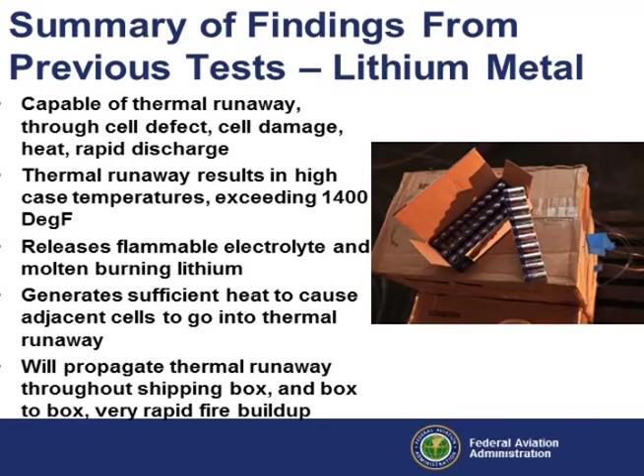They also can explode, and when they do, they generate a fair amount of pressure. They're self-igniting, and they will rapidly ignite the current packaging. The 1301 will suppress the electrolyte portion of the fire, but not the lithium portion, and seems to have no effect on the speed of propagation of thermal runaway.

And again, if you can keep the electrolyte from burning, you end up with an accumulation of hydrocarbons, increasing the risk of flash fire or explosion.

After 10 years, we reached the point where we wanted to see just how the aircraft would react to a relatively large full-scale fire. For that purpose, we used a 727 that was kindly donated by FedEx.

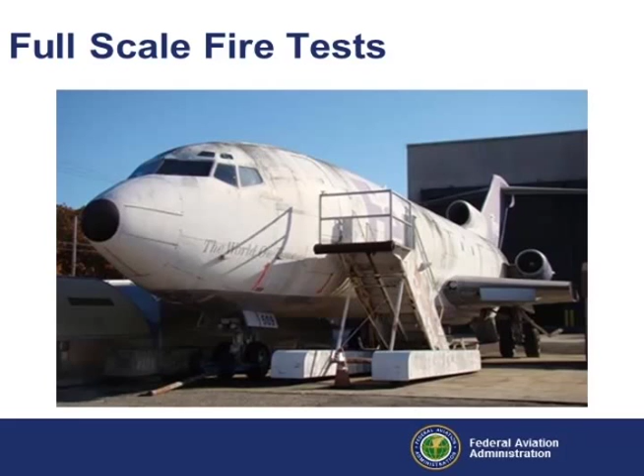The objective of these tests was basically to document the characteristics of fires involving large numbers of small lithium batteries in a realistic aircraft environment.

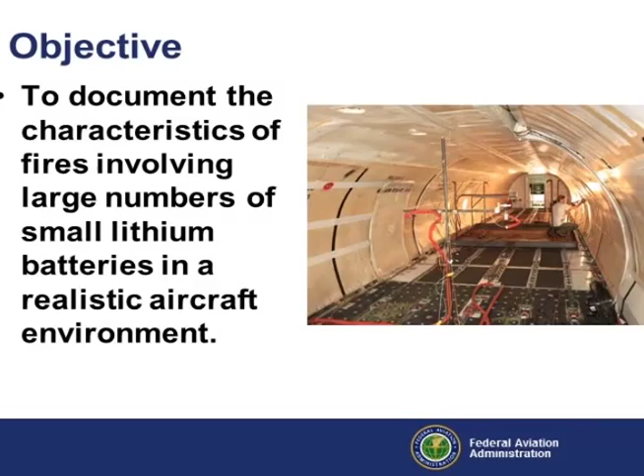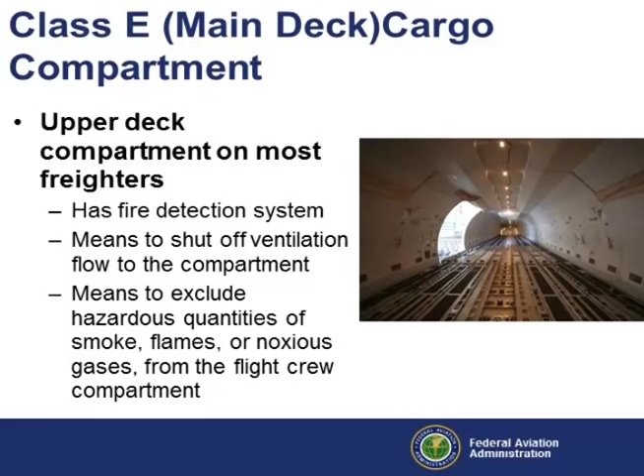It's worth reviewing that an upper deck compartment on most freighters only has a fire detection system. There's no halon 1301. It does have the means to shut off ventilation, and theoretically the means to exclude hazardous quantities of smoke, flames, or noxious gases from the flight crew compartment.

So we developed a test plan. We settled on a fire size of about 5,000 cells, keeping in mind that many shipments can exceed 50,000. So we ran, or were looking at, 5,000 cells of lithium ion.

We ran a separate test with, as it turns out, 4,800 lithium metal cells. And then as a control, we used another 5,000 battery load of mixed older style batteries: alkalines, NiCads, and nickel metal hydrides. We used two different ignition sources, running two separate tests for each fire load.

One where we simulated a thermal runaway, and the other where we had a small adjacent fire to get the cells involved.

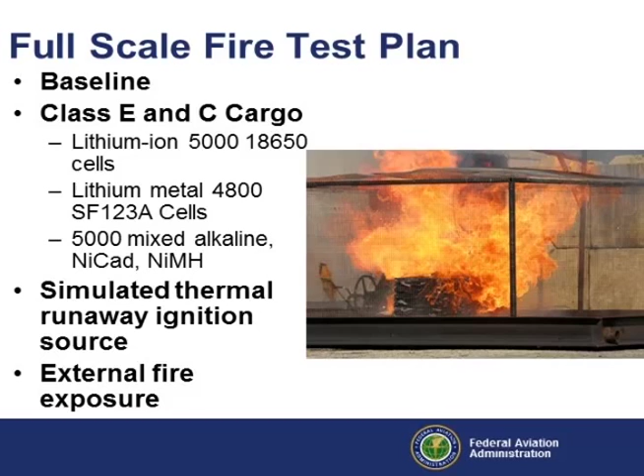So we instrumented our 727 with thermocouples everywhere, smoke meters, heat calorimeters. We measured noxious gas quantities and had extensive video coverage.

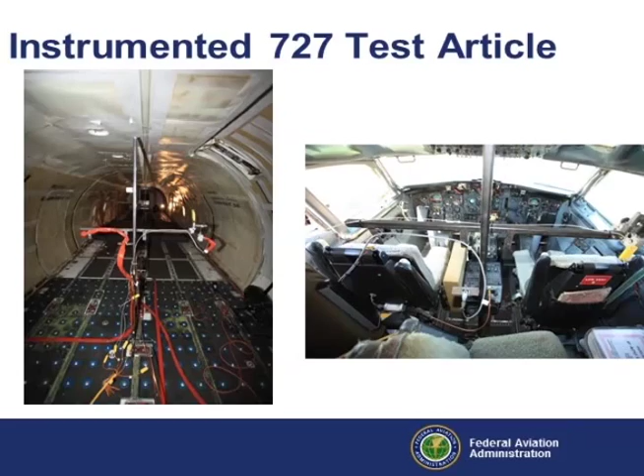We actually repeated all that in three locations: the main deck, the lower forward compartment, and also on the flight deck. Probably the most important thing in this simulation was to get the airflow within the aircraft correct. We wanted to try and simulate a plane in flight while still on the ground.

Air packs are configured differently, at least on a 727, depending on the location of the fire. If the fire is in the lower deck, you set it up differently than if it's on the main deck. So with the help of the Boeing company, we developed two configurations, one for a Class E fire and also for a forward Class C compartment fire. I won't be talking about the Class C fires today, but that information will be available on our webpage.

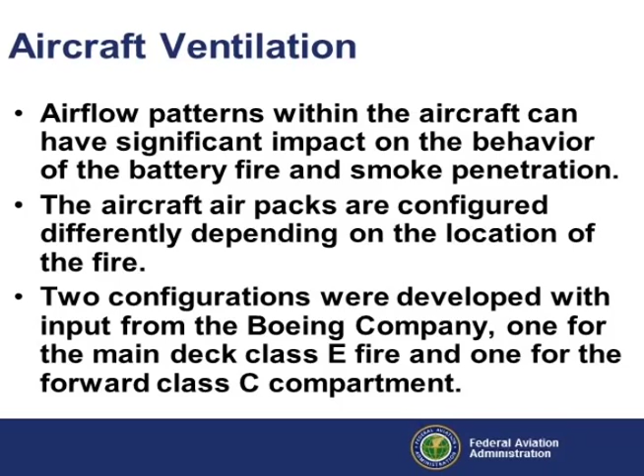To verify that we had the configurations right and were getting realistic results, we conducted air exchange tests and got very, very good numbers. In the unpressurized configuration, which is what you would have in a Class E compartment fire, we got air exchange rates of about almost 48 minutes while maintaining a 1.7-minute air change on the flight deck. We were assured by Boeing that these were good numbers.

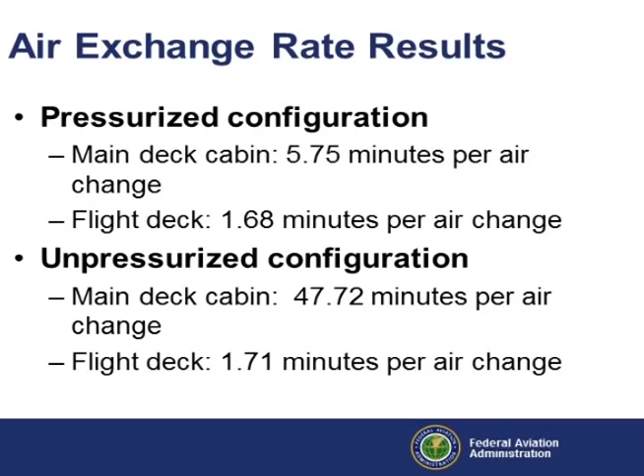We conducted a couple different baseline tests. This one was to verify the operation of all the instrumentation. This was just a cardboard load. And then, can I have this video run, please?

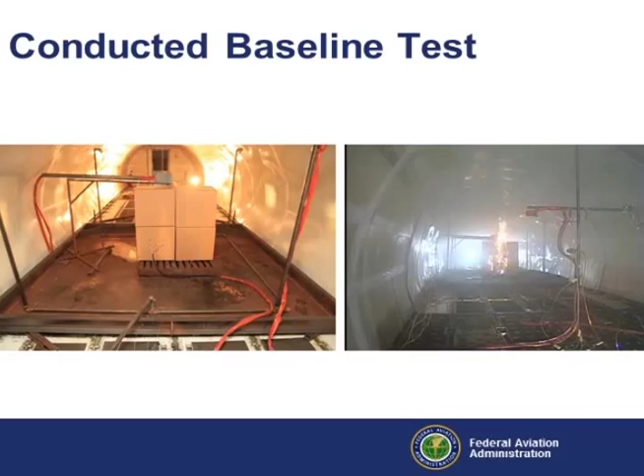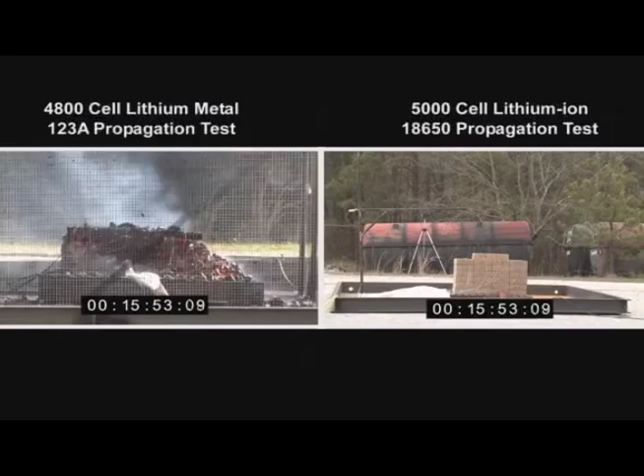We also ran tests outside of the aircraft prior to running the tests in the aircraft, to get a handle on how big a fire a 5,000 cell lithium battery fire would be. These tests weren't run concurrent, but we have them synced up here on the screen. Ignore the gentleman walking in front.

The cells to the left of the screen are lithium metal cells. The cells on the right are lithium ions. Very different behavior, particularly in terms of the timeline. Here at 9 minutes from the time we simulated a thermal runaway, we already had a pretty good fire going on the lithium metal side. Still had not broken through the packaging on the lithium ion side.

A little difference in the way the screens look. We had a cage on the metal test. We didn't use a cage on the ions because our safety people saw the ion test and said, you will cage the metal test.

So the metal fire was over and done in about 16 minutes. We consumed all the cells, extremely hot. The remains of that fire stayed hot for hours and hours and hours. We had over 2,000 degrees down in the middle of that battery stack.

So at this point, we're roughly 19 minutes in from the time we began the simulation of thermal runaway. We've just broken through with the ion test. One interesting thing here, if you watch the debris field around this, the ions really tended to what we call rocket. We had some cells that shot over 130 feet from the base of the fire. One of our video people said it was like being back in combat because these flaming things were shooting over his head, and you can see why our safety people said we should cage the next one.

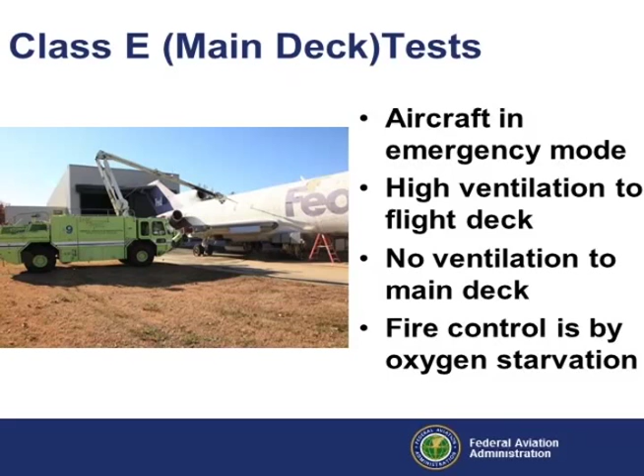Should mention that we had outfitted this aircraft with a deluge water system to control the fire should it have gotten out of control. We were monitoring temperatures not only at the ceiling but above the ceiling and using that as a guide to when we should end the test, so we would still have a test article to work with.

So our initial test was a mixed cell test. Not unsurprisingly, it's essentially a cardboard fire. All the older battery chemistries use a water-based electrolyte; they are essentially non-flammable. So in this case, we let the test run for over an hour and a half. We had a smoldering cardboard fire, got relatively low ceiling temperatures. Fire temperature itself, we never got above 1,000 degrees. We did fill the main deck with smoke, but got no smoke into the flight deck.

One other thing to keep in mind is this is an empty airplane. These are the only flammables that are in the aircraft, unlike what you would see in a more real-life instance. So mixed cells, not really a problem.

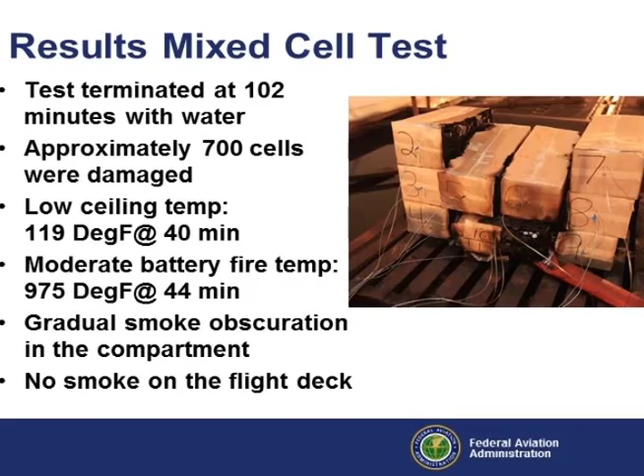We repeated the test with two different lithium-ion tests, one with the simulated thermal runaway and one with the adjacent fire. Got very similar results. We let the fire run about an hour. We only consumed about half the cells, so you have a very long-term fire with lithium-ion cells.

Ceiling temperatures reached almost 1,500 degrees, which is right around the certification level for aircraft cargo compartment cargo liner. Battery temps hit about 1,300.

We did dramatically decrease the oxygen in that compartment during the fire, which did slow the fire down, but it did not stop the propagation from cell to cell and the release of the flammable electrolyte.

We did experience some light smoke in the flight deck near the end of this test, and we also did some significant damage to the aircraft. Even though we didn't penetrate the cargo liner at any point, we had to replace a lot of it prior to running the next test.

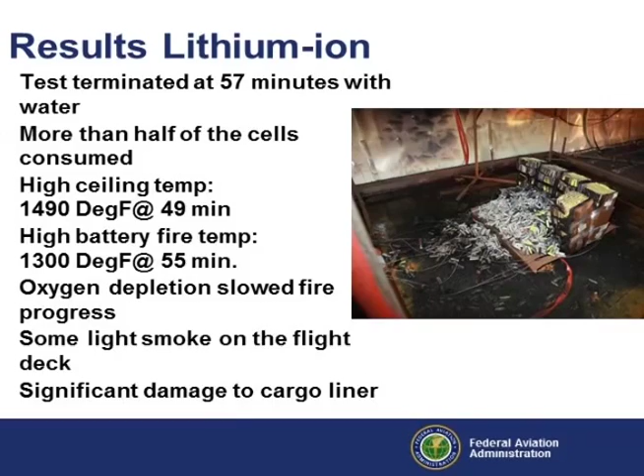Sorry, moved on to the metals test. It looked the same to me.

This test again ran about 16 minutes before we had to shut it down. In this case, the aircraft was in danger of getting a new sunroof in the ceiling. We only had consumed about half the cells in that 16-minute time frame.

Ceiling temps exceeded 1,700 degrees. We're not exactly sure what the battery stack temperature was because our thermocouples peak at 2,250, and we easily exceeded that. Oxygen starvation with lithium metals had very little effect in slowing down the fire intensity.

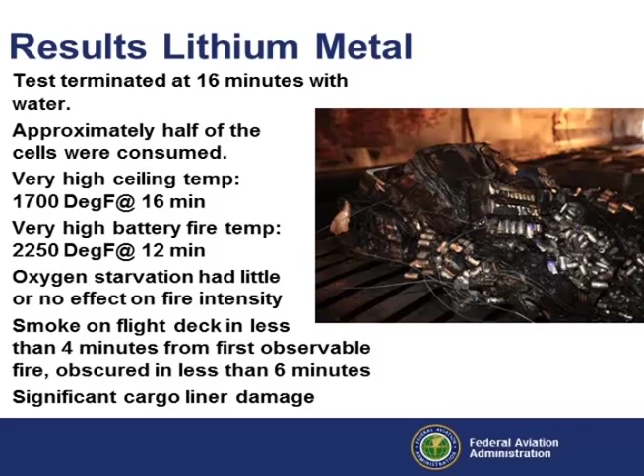And probably most significant, we got smoke on the flight deck less than 4 minutes from the first observable fire, and we were fully obscured within 6 minutes. Again, we did significant damage to the aircraft.

And I do have a video of that test, which if I could have that run, please.

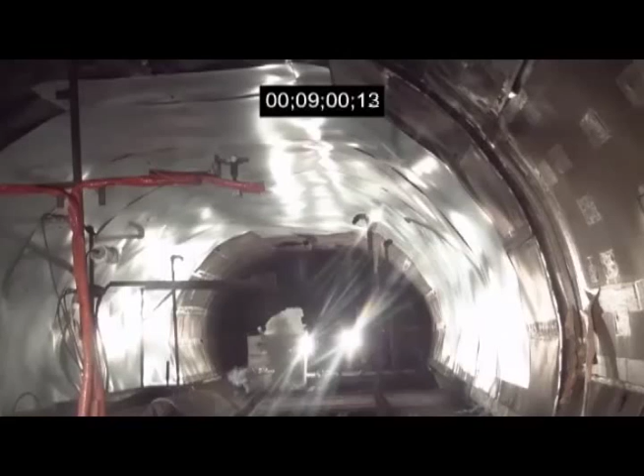At 9 minutes from the time we turned the heater on that simulates a thermal runaway, we had the fire break out of the boxes. If you keep an eye on the clock counter, it skips ahead a little bit, but fire buildup was incredibly rapid.

So it's actually probably about now you would begin to get smoke warnings in the cockpit, smoke detection. And at this point, you've already got a pretty good fire.

So here we're roughly a minute from the time we first saw the initial flame. The smoke is already beginning to build up within the compartment. You would see a more rapid buildup in a compartment, obviously, that is full of cargo. The image on the right is an infrared view because we shortly lose the visual.

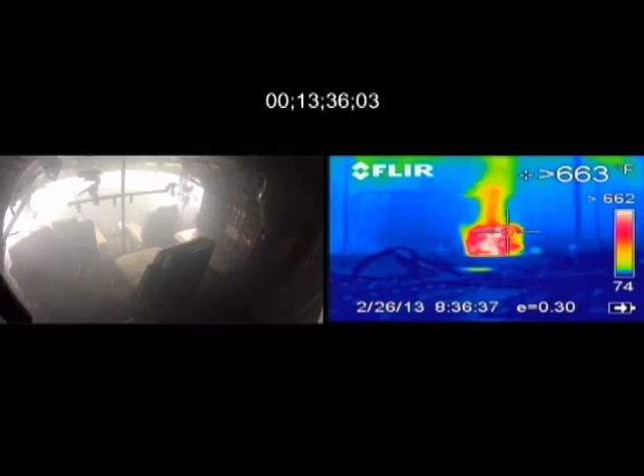Now, this aircraft was slightly fire hardened in that we put an extra layer of cargo liner above the fire itself. So a normal aircraft, you might have had penetration earlier.

So at this point, the flight deck is fully obscured, and we are extinguishing the fire with copious amounts of water.

So just a little rehash. We ran the 2 different ignition sources. We simulated the thermal runaway, and we also used an external fire to initiate the battery fire. Except for a little bit of differences in timing, we saw very little difference, or no difference at all, in the final effect and the final fire.

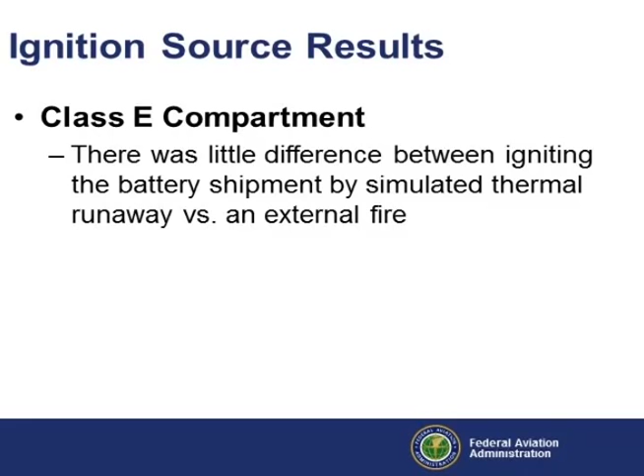Looking at the Class E tests, how well did the compartment do in containing these tests? With the mixed cells, it easily contained the fire. Lithium-ion cells, we would call it marginal in that we didn't have any penetrations for an hour, but in reality, if we had gone much beyond that, we would have had some areas where the cargo liner would have failed.

The lithium metal flat out did not contain the fire. We in no way at all did the Class E concept work with lithium metal batteries.

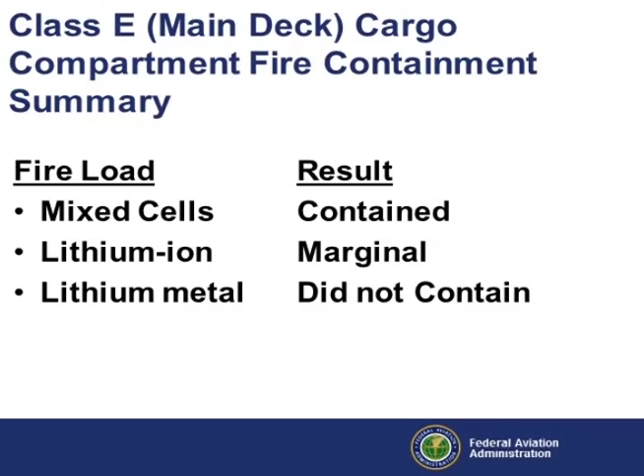Now I have one more video, and I just included this to give you an idea on the explosive properties of the hydrocarbons released when these batteries go into thermal runaway.

To set this video up, we're doing some work looking at charging stations for tablets. A lot of airlines are going to tablets for passenger entertainment, and they're using these charging stations where you have multiple tablets and a container all hooked up and charging.

In this particular test, we used a galley cart to simulate the charging station, and it only had 5 tablets in there, of which really only one of them got involved in this fire. And I'm going to let it play here.

What happens is it self-ignited, which sometimes happens with an ion cell. We had a pretty good fire going.

This was in a 737 test article that we have.

We had an explosion that actually put itself out, but as you can see from the smoke coming out, there's still hydrocarbons being released by the burning cells. So not being content to let it go at that, we decided to give it an ignition source, and we got that.

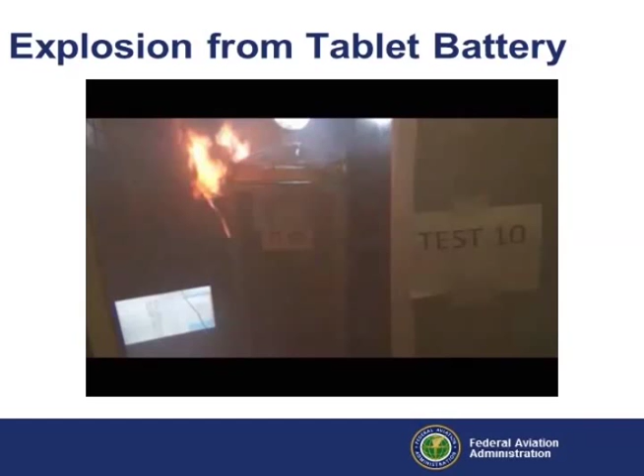Even though I didn't talk about our Class C work today, we did have an event with one of our Class C tests where we had an explosion in the aircraft that resulted in significant damage. And if you want to take a look at that, you can go to our website. And if you search on lithium batteries or look through any of our recent triennial proceedings, any of our systems meetings proceedings, you can find a wealth of information on lithium batteries.

Thank you. Thank you, Harry. Turn it over to John. Okay, if I could have the presentation up, please. So first of all, thank you for that, Harry.

The work that my company's been doing has really been looking at how can we protect lithium batteries and equipment containing lithium batteries at the package level. Very brief background. My company specializes in fire and thermal management. Many of you probably use our products every single day but have no idea you're using them. We do many things ranging from the technology that enables carpet in aircraft to meet low smoke and toxicity as well as flammability requirements, all the way through to cargo liner repair products that maintain the integrity and fire performance of the cargo liner.

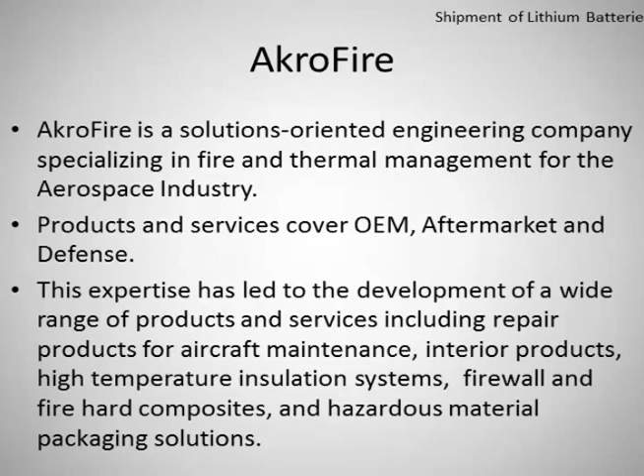So what does that all mean with regards to lithium batteries? Some years ago, there was a rule called HM224B, which really covered the shipment of oxygen generators and oxygen cylinders. And there were two key aspects to this rule with regards to flammability. The first thing was that oxygen cylinders and generators needed to be packaged in boxes and containers that would prevent flame from exiting or entering the package and causing either the oxygen generator to ignite or the oxygen cylinder to vent and obviously add oxygen to the fire.

The second aspect of that rule was also in the event of a halon-damped cargo fire, the inside of the packaging needed to stay below either the self-venting temperature, which was 300 degrees for an oxygen cylinder, or in the case of an oxygen generator, not allow sufficient temperature to cause the oxygen generator to ignite and therefore, again, add to the fire. In response to this rule, AkroFire developed a range of fire and thermal pack technologies, and together with Americase, we developed a complete range of HM224B packaging solutions.

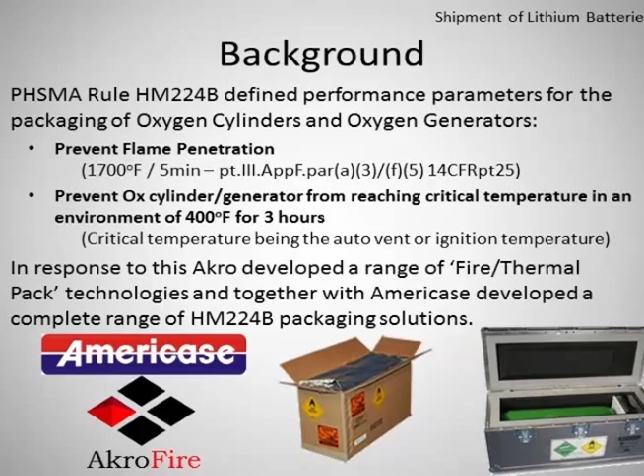So then looking at future hazmat challenges, obviously lithium batteries then came to the forefront as a real challenge. So we decided to look at how we could use our HM224B experience and technology developments to mitigate the threat of lithium batteries at the package level. The existing concepts that are out there are very much based on our HM224B work, which includes rigid metal containers containing the fire pack technology, together with simple overpack containers which are designed to just stop a small-scale fire on the inside of the box.

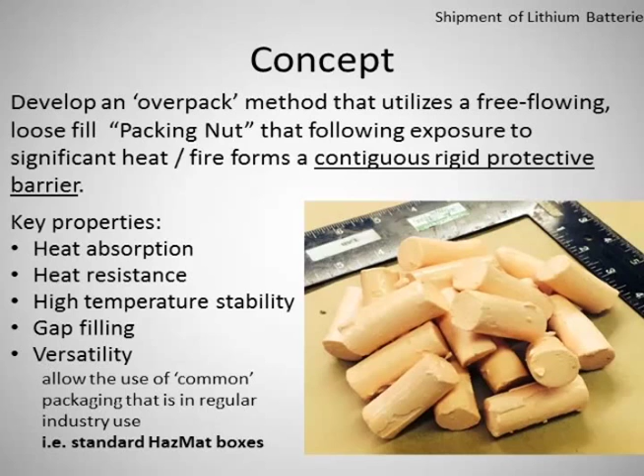The real challenge in creating a packaging method is the incredibly broad spectrum that covers lithium battery shipments. The oxygen generators and oxygen cylinders were very, very defined shipments, but as we've already discussed, the sheer quantity of batteries and equipment containing batteries being shipped makes it a challenge to come up with a packaging methodology. So the concept that we've developed is essentially a free-flowing, loose-fill packing nut that, following exposure to significant heat and fire, forms a contiguous, rigid, protective barrier. The key properties of these packing nuts are that they're heat-absorbing, heat-resisting, have a very high temperature stability, they'll gap-fill, but more importantly, they're versatile. And what we mean by versatility is that you can use common packaging in regular industry use, i.e. a standard hazmat cardboard box.

For the testing, in the absence of any clear definition of what testing requirements we would need to do, we drew upon work the FAA had done as well as HM224B and settled on 3 key areas. One, we needed to protect the batteries or the equipment containing batteries from an external fire. We needed to protect the batteries from heat, either the cargo or the damped cargo fire scenario, and then also containment. That is, in the event of a thermal runaway incident, we needed to contain that in the package and prevent it spreading to adjacent packaging.

In terms of the threat model we used, we chose to use lithium metal batteries, and in particular the CR123 cells. These are highly energetic and render much more conservative testing when compared to, say, lithium-ion secondary rechargeable cells. But for our testing, we really wanted to test the packaging and understand how well we could contain the threat. Just as a reference point, a typical CR123 is approximately the same power capacity as a fully charged smartphone.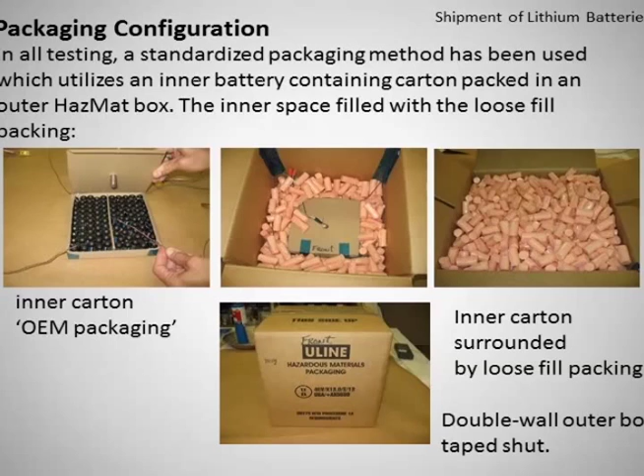So the first test that we really looked at was the direct flame impingement. And we wanted to use an industry-recognized performance requirement. So in this instance, we used the FAR 25.855, which is the cargo liner test. And essentially, this is approximately a 7.5 BTU flame with a minimum flame temperature of 1600 degrees Fahrenheit for a 5-minute duration. And for us, we're looking at ensuring that during that 5-minute event, the batteries aren't affected by the fire. And affected means that, first of all, they don't go into runaway, and they're not actually adversely affected. So we need to keep the temperature and the flames away from the batteries.

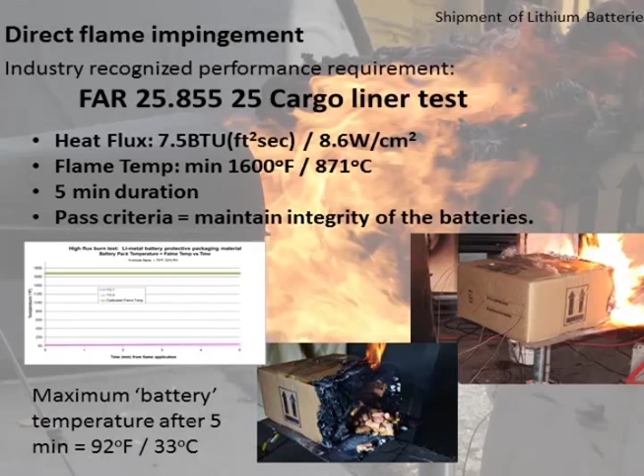If we have the video, please. So here you see the burner being swung onto the box. As you would imagine, very quickly the cardboard disintegrates under the fire threat. And as you see here, the actual packaging is swelling up and fusing together and providing that continuous or contiguous barrier that I mentioned earlier.

The next test we looked at was the suppressed cargo fire, which is a thermal resistance test. And in essence, what we're trying to do here is look at a damped cargo fire in a maximum sort of diversion time for that type of event. And so that was from the HM-224B rule, which was really a 400 degree Fahrenheit environment for 3 hours. And in that time, we wanted to make sure that the packaged batteries or equipment wouldn't reach a temperature which would cause the batteries within that equipment or the batteries themselves to go into thermal runaway and then start to contribute to the fire. So just as a point of reference, the work we have been doing indicates that lithium metal batteries can go into runaway as low as 350 degrees Fahrenheit, lithium ion 450 degrees Fahrenheit, and then lithium polymer 330.

Here you see on the pictures the box after the oven test, and as you open the box, you can see the packaging is fused together, and this gives a very good picture of what happens after prolonged exposure to heat. And as you dig into the packaging, you can then get to the actual piece of equipment you're shipping, and it's unaffected by the temperature.

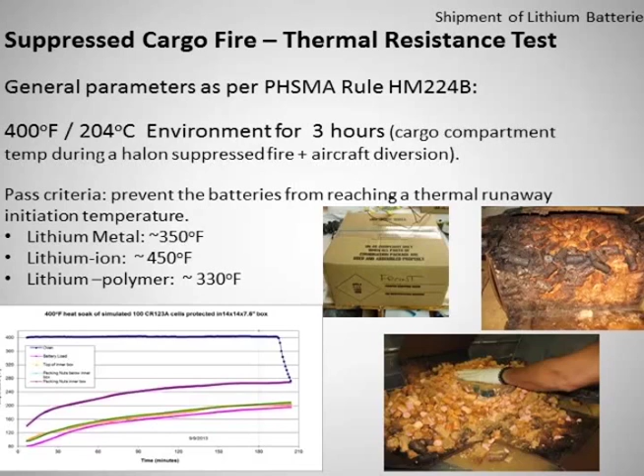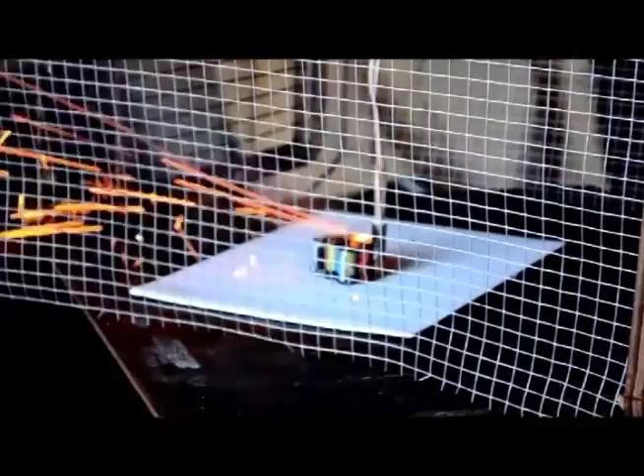The next challenge is the thermal runaway. And if I could have the video. What I wanted to show here was just 8 cells going into thermal runaway. We're initiating it using a cartridge heater, which you can see on the right. As soon as the cells go into runaway, we disconnect the cartridge heater. But I think this gives a very vivid indication of what happens when these cells go into runaway. And we're talking about cells that are little more than an inch in height, so a very small, compact area, but an incredible energy density and a resulting fire.

So what you see is, as a cell goes into runaway, you first of all get venting of the cell, which results in sparks and flames. And then a very rapid temperature rise, which then spreads to adjacent cells, very much in a cascading effect.

All of the videos I'm showing you have no sound because grown men screaming can obviously be upsetting.

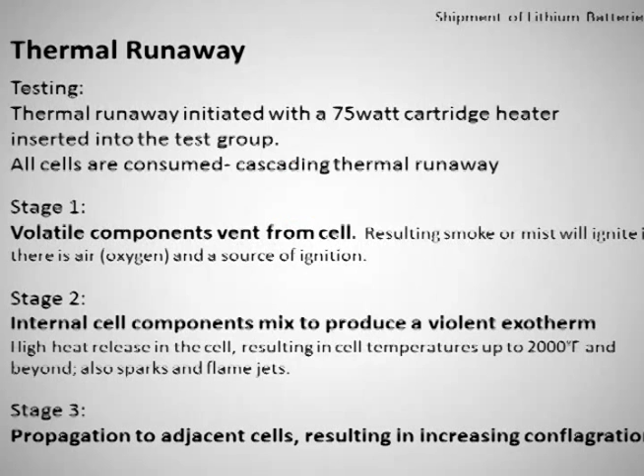So, as I mentioned, testing in the thermal runaway, we're looking at using a cartridge heater that's inserted in the group, and typically in all of our tests, we're fully consuming all of the cells in a cascading runaway. And the cascade, or the runaway, really runs or covers three significant areas.

The first is the volatile components vent from the cell, and that results in a smoke or mist which will ignite. The second stage is the internal cell components mix to produce a violent exotherm, and we regularly see cell temperatures up to 2,000 degrees Fahrenheit in our testing. And then the third stage is that propagates to adjacent cells, resulting in an increased conflagration.

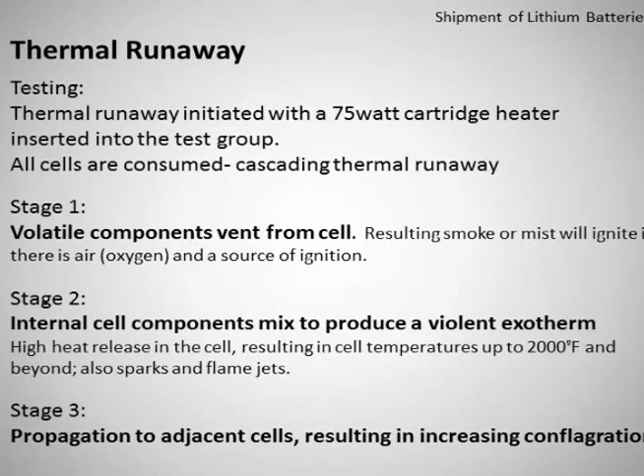So, as we've been developing this product, we wanted to look at other recognized packaging methods. And one thing that keeps coming up at the forefront in hazmat packaging, for lots of product but also cells, is the use of vermiculite. Primarily for road and ground transport type applications, but it is a common method of transporting lithium batteries and lithium battery containing equipment. So we really wanted to see how vermiculite would cope with, say, 100 cells of the CR123A. If we could have the video, please.

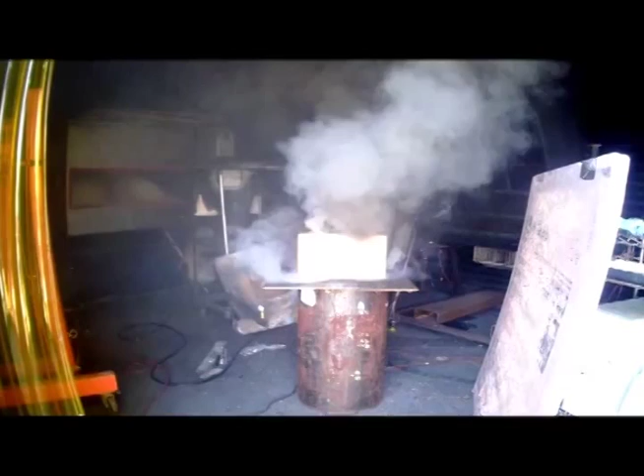Again, the vermiculite is packed in a standard hazmat packaging box. And what you'll see as this video progresses is vermiculite being forced out of the box as the pressure rises up inside that box. And very quickly, the cells in runaway overcome and will ignite and then actually exit the vermiculite, and you have a pretty uncontrolled fire at that point. And I think vermiculite is chosen because under available regulations, it's determined non-flammable.

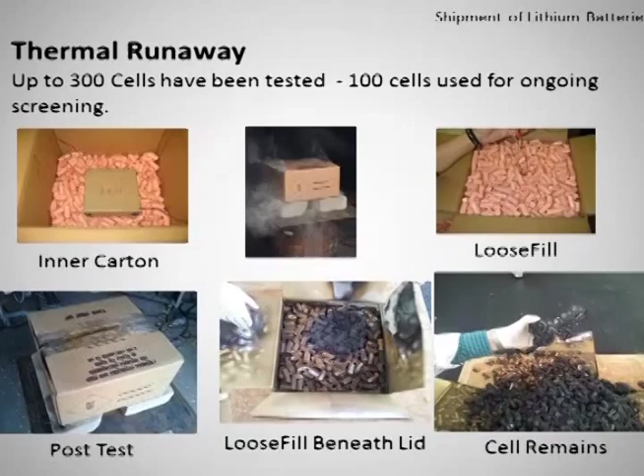So in our testing, we've tested up to 300 cells, and we've really stopped at that because we feel that 100 cells represents a viable, practical packaging method for the types of applications we're looking at, which is the smaller boxes of cell phones or laptops or equipment, damaged or defective equipment, etc.

And here you can see both before a test and then after the test. Post-test, the box is all intact. As you open the package, the packing peanuts are fused together, and then as you dig in, you get to the remains of the cells, which have all gone into thermal runaway and have fused together.

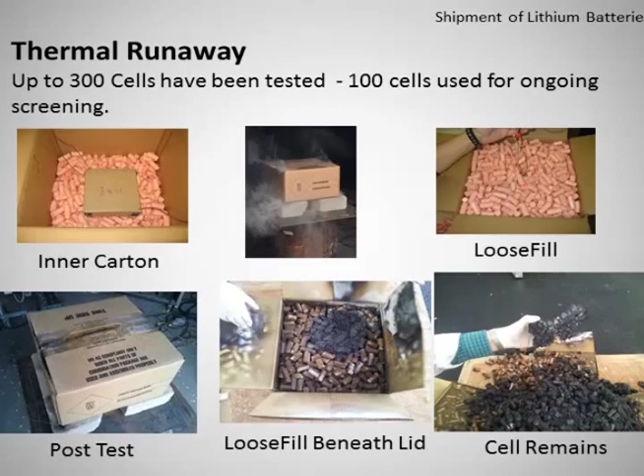And if I could have the final video, sorry. And this is that test. And as you can see, at this point, all of the batteries are in runaway. We're getting temperatures just below 2,000 degrees Fahrenheit in the center of the packaging, but the cardboard box is containing that event.

And so, in terms of what's going on in there, this graph gives a very good indication. Unfortunately, you can't see the clarity on the screen, but the first blue line you see there is a cartridge heater. And as the cartridge heater heats up, the adjacent cell, which has a thermocouple on it, also heats up. And when that adjacent cell goes into runaway, then we disconnect the cartridge heater. And you see this rapid rise as that cell goes into runaway, and then all of the adjacent cells going into runaway.

Interestingly, at the very bottom of the graph, you'll see the line there, and that's the external temperature of the box itself. And we're typically getting external temperatures of around 200 degrees, which is well below the ignition point of cardboard, which is around 400 to 500 degrees.

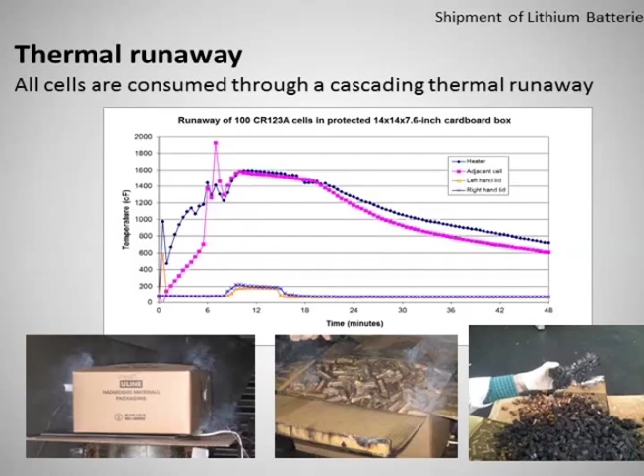So, in summary of the available options, we have packaging out there available for shipping lithium batteries now, and that can range from the aluminum super box, which is a thermally insulated battery shipper and is very similar to the oxygen cylinder container developed for HM224B, a simple fireboard box, which is designed only to contain a battery fire or limited numbers of batteries, and then all the way through to the loose fill or the packing peanut concept that I've talked about just now.

So in conclusion, the loose fill concept provides a practical, economical and, more importantly, flexible method of enhancing the safety of shipping lithium batteries and lithium battery containing equipment. Broader logistics will likely dictate the type of packaging, i.e. reusable versus single use. But these packaging methodologies supported by testing provide a practical and effective option for the shipment of lithium batteries. And threat mitigation at the package level is an important element to a multifaceted approach to safety in shipment. Thank you.

Thank you. Today I want to talk with you about the work that we're doing at UPS to improve freighter fire protection during any type of smoke, fire, and fume event. Before I really begin the presentation, I want to talk about what our safety task force is.

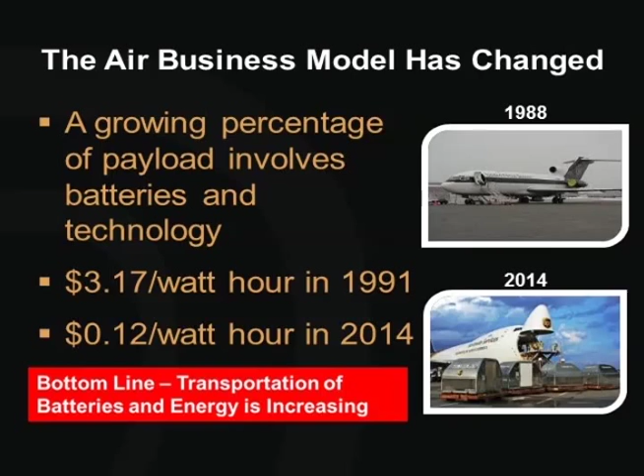Although the battery stopped working in this remote. It's the revenge. Yes, it is. Next slide, please. Wrong presentation, right? I'm pretty sure this is a Portable Rechargeable Battery Association getting back at us, but thanks.

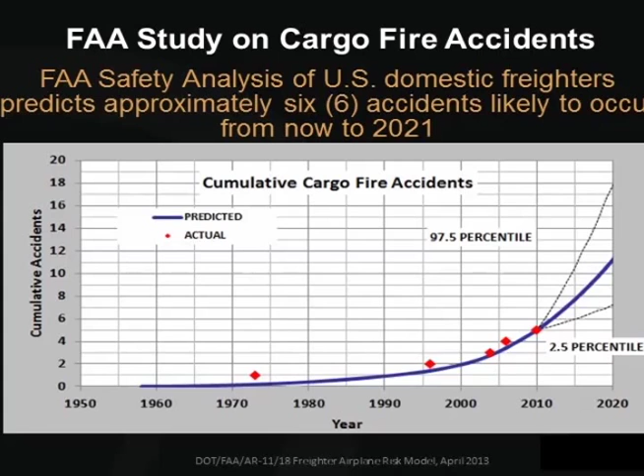This same research that the FAA had done, it's an Excel spreadsheet. It allows you to put in mitigation strategies and see what you can do to reduce the risk. So now you understand that there's more batteries being shipped and the risk is going up. So let's talk about how we can protect us and protect the flight deck. And the pilots are really the last line of defense of that. We found there were 2 things we could do right away that would improve safety.

And the first is taking a look at the oxygen masks that we carry on board our aircraft. Our aircraft primarily had 2-piece, the mask goggle combination, which takes in excess of 20 seconds to put on, and it takes 2 hands. We have since converted all our aircraft into a full-face oxygen mask, which takes 1 hand to put on, and it goes on in less than 5 seconds. In addition, it's better for eyeglass wearers. It does a better job at preventing toxicity from entering to the pilot. So it's just a marked improvement.

We also took our supernumerary area of the aircraft, and where we had Dixie cups for the passengers and for the jump seat riders, we replaced that with oronasal pressure breathing masks to better protect the occupants on our flights. The other improvement is the EVAS system, the Emergency Vision Assurance System.

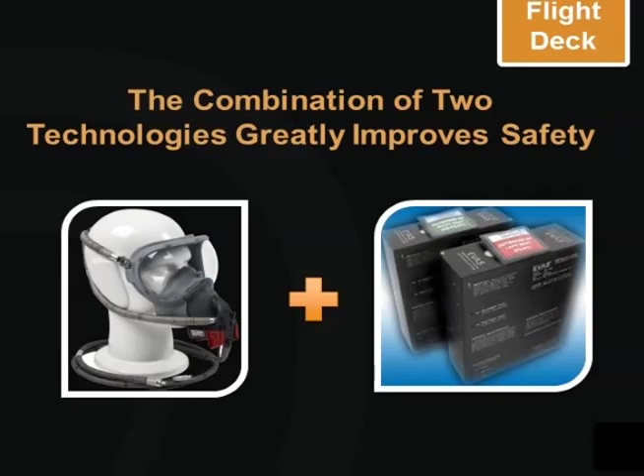And what that allows you to do is once it's inflated, it allows you to see both the flight instruments and outside the cockpit window in a densely filled smoke environment. I put this picture up to show you what it looks like. This is a 757 simulator, and there's actually 2 units, one for the captain, one for the first officer.

They deploy in approximately a minute. We did an independent study of this technology. We took a simulator, introduced smoke into it, and had experienced pilots flying it. In a heavily smoke-filled environment, like UPS Flight 6 was, they lost control of the aircraft in about 2 minutes. Then we did the same test, but allowed them to use the vision assurance system, and they were able to safely land the airplane in both instrument approach and visual conditions. So it's that kind of technology. It represents the last line of defense, but it truly works, and it's an improvement.

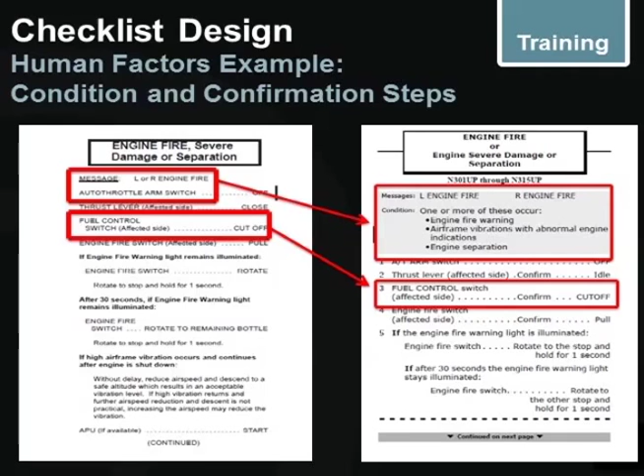We also looked at how we train. There's a standard called CAP 676 that has to do with human factors design and checklists, put together by NASA, the FAA, and EASA. We've tried to introduce some of their human factors concepts into our checklist design. Things as simple as numbering the steps that need to be done in a checklist. They find that if you're interrupted, it's much easier to know where to go when those steps are numbered, or expanding on the condition of the problem so you're in the proper checklist, and enunciating confirmation steps. All these are simple human factors things to make it better. Our airline, like many airlines, also used to train emergency equipment as individual modules.

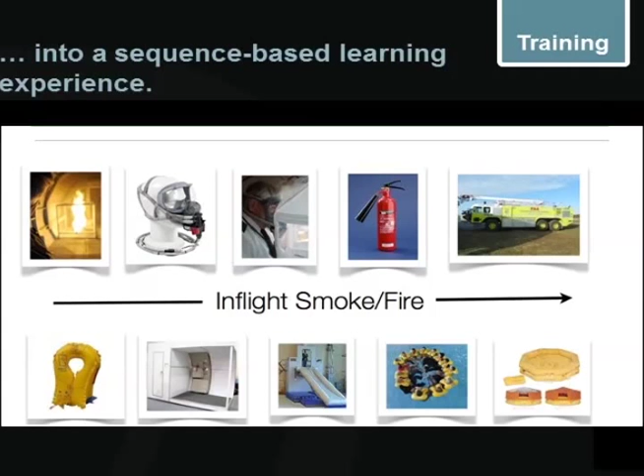You might learn about a life vest, then a fire extinguisher, and perhaps your oxygen mask or what kind of firefighting rescue equipment was available. But we talked with education experts and found there's a thing called sequence-based instruction, and the order you learn something in really makes a difference if you're going to remember how to do it when called upon in an emergency. So we've reordered some of the ways we're training. We're training those same modules as before, but in a sequence, so when you're called upon in an emergency and have to recall from A to Z what to do—in this example, an onboard fire, putting your mask on, deploying your EVAS system, fighting the fire, and what kind of ARFF equipment would be available on the ground—we're trying to train now in a sequence to better educate the pilots.

But finally, we come to what I think is probably most relevant for the audience today, and that's protecting the aircraft. What we found is that some new materials and designs are really making a difference. At UPS, we've incorporated fire containment covers over palletized freight now, and these covers are used from origin to destination. So if something's leaving Hong Kong but going to Miami, it's covered the whole way, or wherever in the world it is going. We cover two types of things.

We cover anything we know is an energy shipment or battery-type device, and we also cover things we don't know what they are. When a pallet comes to us from a shipper and we're not sure if it has electronics in it or not, we err on the side of safety and cover that shipment as well. Pallets of flowers we don't cover, but if we don't know what it is, we're covering it. We were putting a cargo net over it anyhow, and we've engineered a way to utilize these covers—it takes no longer to put them on. Yet these covers have demonstrated 1,500 degree protection up to 4 hours, and that's been a goal we've established: 100% of our flights could be on the ground somewhere within 4 hours.

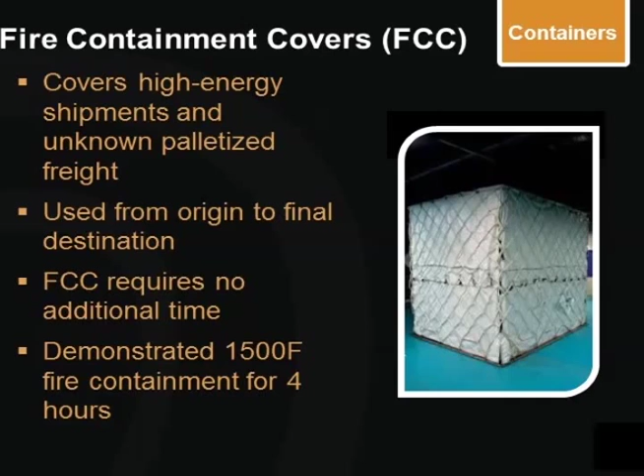We've also done a lot of work engineering unit load devices. When we first started this, we found our ULDs would fail after about 8 minutes if there was a fire on board, or maybe as long as 20 minutes. So we established that goal of 4 hours, and using a new material called Macrolite, we've been able to consistently achieve 4-hour fire containment of a Class A fire. That material is actually lighter than aluminum, stronger than aluminum. It has some good ballistic properties in case batteries were to be firing around, but the most important thing is the safety margin it provides—that 4 hours of containment. Right now we have more than 2,000 of these containers in service, and we just placed an order for another 1,400. So we're really happy with what's going on in that regard.

What we're working on now and next is that same ULD, but putting a suppression system in it.

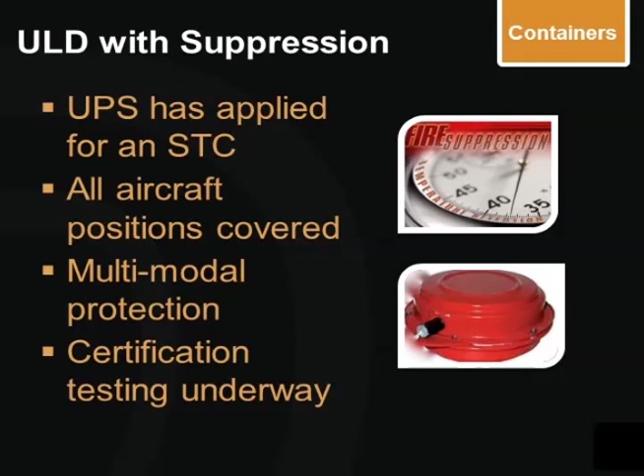And right now we've applied for an STC. The reason we like this system is because every position in the aircraft would be covered. Not only that, it offers multimodal protection, meaning that these containers can roll off an aircraft, roll onto a semi-truck, roll into a sort center, and for that entire transportation sequence, our employees are protected, the facilities are protected.

It just offers that all-around protection. So certification testing is underway right now, and I'll tell you, it's a tough project, and we've done a lot of tests, and this isn't an easy solution. It's taken a lot of engineering effort to get there, and we're not there yet.

We're very close, and still working on the certification. What I want to do now is show you a very short video. It was actually made in October of 2012, but I think it really illustrates the points of what it is we're trying to accomplish at UPS.

The FAA and UPS IPA Joint Safety Task Force are getting ready to start a fire, but first they need something to burn. So they're putting together a container load of test packages, books.

But work is continuing, and the progress so far has been remarkable. To be looking at a ULD that can contain a fire for 4 hours was unthinkable a year ago. And we continue to see that here at the Tech Center every test we have. What this group has been involved in is something that's going to change the industry.

So I want to leave you with some final thoughts. Enhancing aviation safety is possible, and we can do this. Some of these new technologies are showing great promise. We need to work together, and when I say we, I don't mean just the pilot associations and the airlines. I think the regulators have a hand in this.

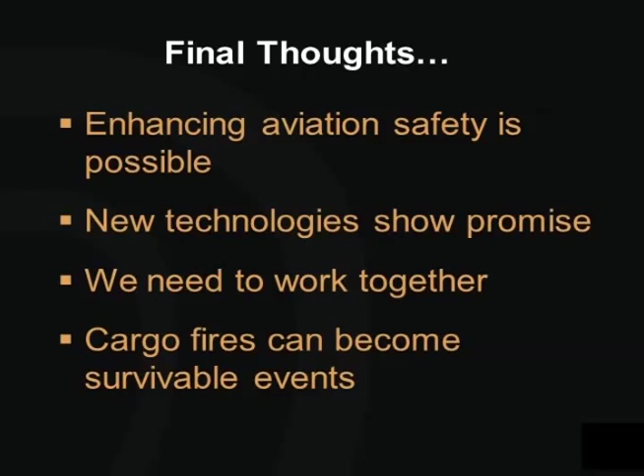I think the battery manufacturers have a hand in this. I think some of the work being done in packaging is important. I think it's a multi-layered solution to reach the objectives that we're trying to reach. And probably the most important final thought is that these cargo fires can become survivable events.

Today, if you have a cargo fire, on average, you have 18 minutes before there's a catastrophic end to that event. And when we're able to continue to fly for 4 hours and land safely and go home to our families, I think that means everything. So collectively, we need to work together and make these cargo fires survivable events. Thank you.

Currently where I work at FedEx, much has been done and more is planned for fiscal year 15. As you can see from nose to tail, a lot of safety improvements, and these are just the ones focused on fire suppression and cargo fire management.

EVAS will be deployed this year at FedEx. We've had full face oxygen masks and we've enjoyed them for over 10 years at this point. Fire curtain and rigid cargo barriers have long been deployed in the cabin area. Things that are new and under development are fire containment covers, as well as thermal bags for the belly freight.

The main deck fire suppression system in the MD-11 and 777 is what I'll spend some time looking at in later slides. It's worth noting that these cargo fire management technologies sync up with CAST, Joint Safety Implementation Team recommendations found in Safety Enhancement 127. That's dated back in late 2008.

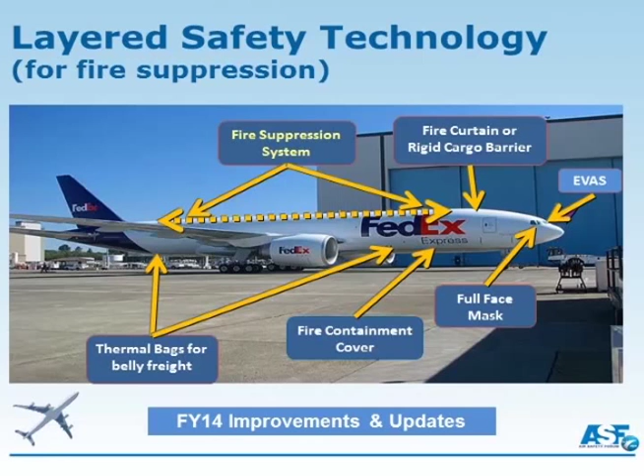At FedEx, there's been modifications made to several container devices. Containers with an open side have been modified with a fireproof curtain and clamshell locks to improve suppressant retention within the container. There have been modifications made to the fire containment covers that are put over DG freight tied down to pallets for transport, much like you saw with UPS.

And the meat of my discussion will be the implementation of our fire suppression system on FedEx MD-11s and 777s. But before I start to describe that system to you, it's better that you might visualize another system you might already be familiar with, because it's mechanized very similarly to our fire suppression system.

We've come to think of a camera and microphone hovering just above and behind the quarterback and running backs in college and professional football games as the norm now. That system is known as Skycam or cable cam, depending on what network you're watching. It's an automatic and autonomous system that goes wherever the football goes, up and down the field, left and right to each sideline, using a system of cables strung over top of the field.

Now transition to the MD-11 football field or main cargo deck, as depicted in the fire suppression system display. The front of the airplane's main cargo deck is at position 1 to the right of your screen, and the back position is 14 where the tail tapers. The green squares represent positions where each container is located, 2L representing the second left position and 3R representing the third right position.

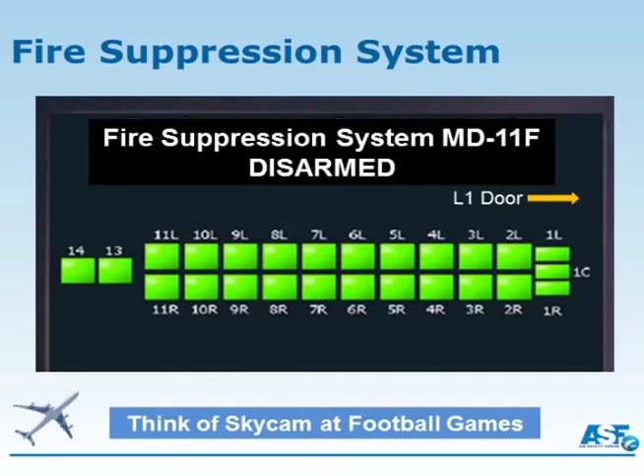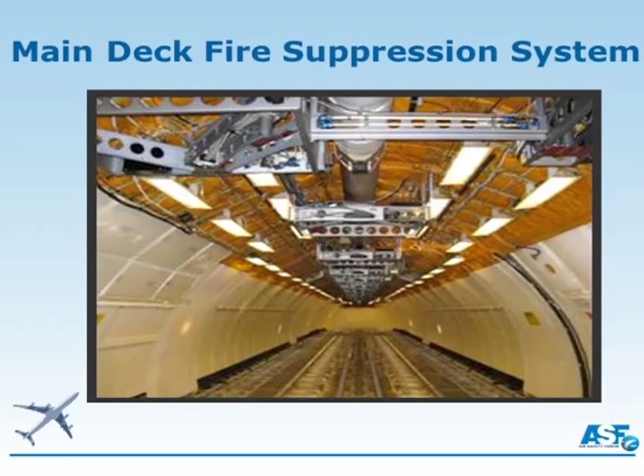Next slide, please. So over each container position are thermal sensors to detect container temperature above a certain level, or a rapid rise in a container's temperature.

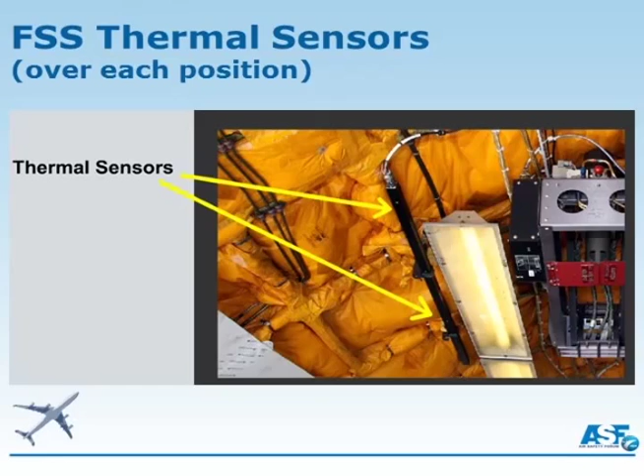The fire suppressing agents are a combination of argon gas under pressure, used to push the fire suppressing foam or surfactant that moves through the skeletal tubing that you viewed two slides ago. Argon was chosen because it's an inert gas and one of the least reactive elements out there to choose from.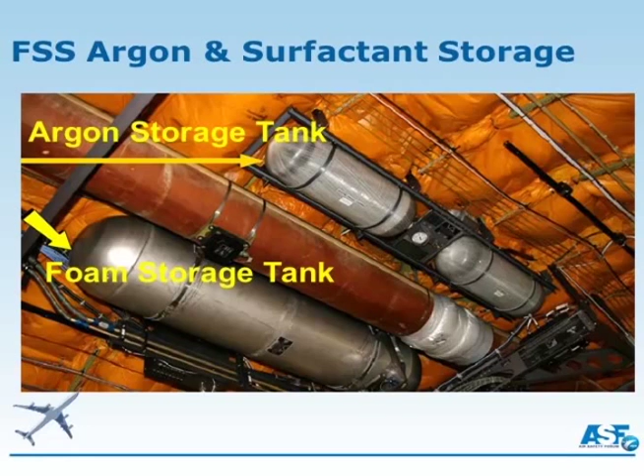Similar to Skycam moving to where the ball is, the penetrator actuator moves to where the heat is. Then, when overhead the hot container, it thrusts a sharp penetrator into the container and delivers the foam to suppress the fire or whatever is causing the thermal increase.

The upside of the system: it's automatic and autonomous, allowing a notification to come to the cockpit, allowing me and my first officer to land at the nearest suitable airport. The downside: it's good for one shot. If another container has a thermal event after initial discharge, it's not there to help you.

This system may not fully extinguish a lithium battery thermal runaway, but it can suppress it in a way that buys time and allows us that time to get on the deck. So this is a good safety technology layer. It's not a silver bullet for all fires or all thermal events. We need to continue developing other technologies for that layered approach.

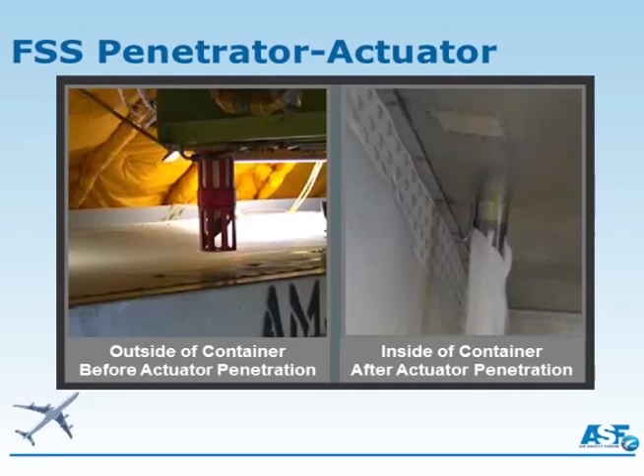So this is the here and now risk, as our other panelists have described. The going-in position for me is a thermal runaway of a lithium battery is a significant risk, and when you add them together, it's a greater risk by a lot.

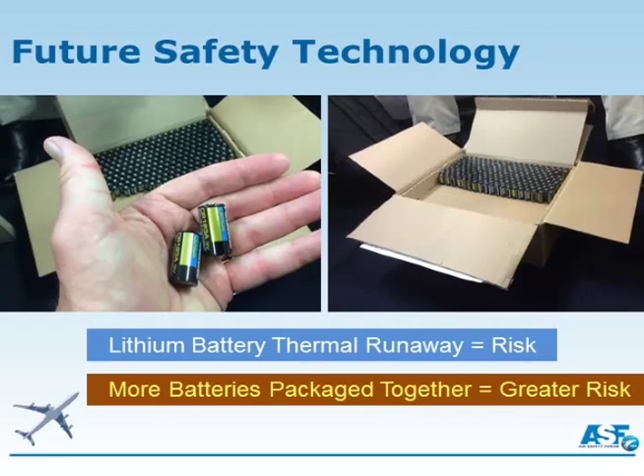So moving to future safety technology, research and development at FedEx is important. The CR123s you see on the left get packaged in 4 trays that stack on top of each other in the box you see on the right. There's about 300 batteries in each tray.

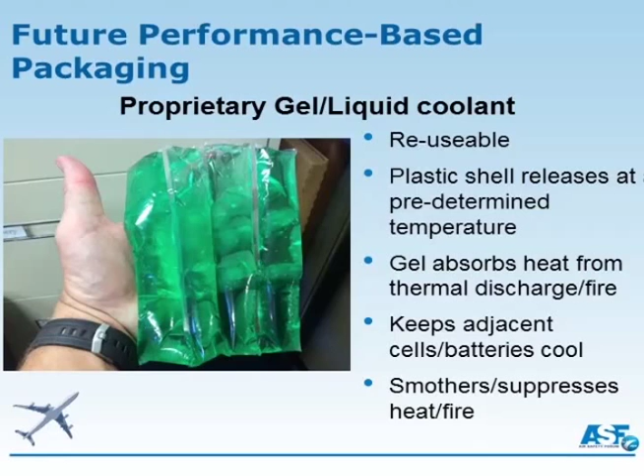FedEx is developing performance-based packaging with a proprietary liquid gel coolant that has a very unique heat transfer capability. It should actually be labeled a liquid coolant that turns into a gel as it absorbs heat. It's reusable. The shell surrounding the liquid coolant ruptures at a predetermined temperature, and because of the heat, the liquid coolant coagulates into that gel around the runaway battery, reducing the risk posed by a ripple effect to adjacent batteries from heating up and running away.

Some practical development on this technology as it matures: it requires a coated tray to keep the liquid gel coolant from absorbing into the cardboard once released from its plastic shell. If you remember the picture of the tray of 300 batteries, this white coated tray would fit inside that cardboard tray. The liquid gel coolant pack would sit on top of the batteries, and at that predetermined temp, the plastic ruptures, the liquid oozes out and coagulates around the bad cell. That reduces risk for that tray of batteries. If they're stacked on top of each other, it's another variable to add to that risk equation, but it's a very good potential layer to add to our safety technologies.

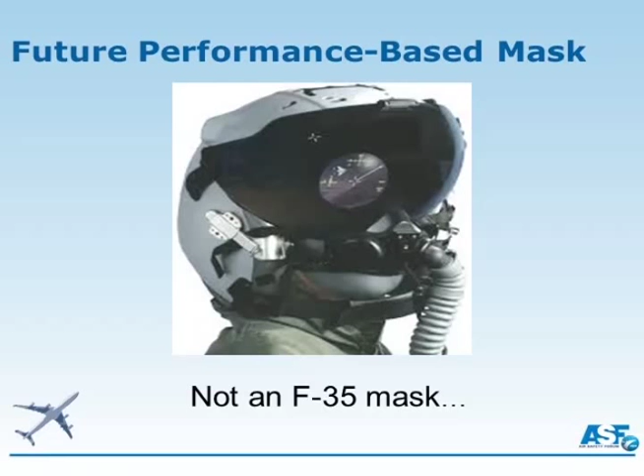Another safety technology we're looking at under research and development is a performance-based mask. Unfortunately it's not this guy's mask or suit, and it's not that guy's mask. It's an off-the-shelf product we've been using for all of 10 years at FedEx, a full-face oxygen mask. Except this mask has an eyepiece similar to a Google Glass, integrated into the mask. It shows an integrated HUD display and serves not only as the primary attitude instrument, but overlays an infrared picture into the HUD field of view so you see that regardless of what's going on outside the mask and inside your flight deck. So another technology solution with off-the-shelf products, another layer of safety.

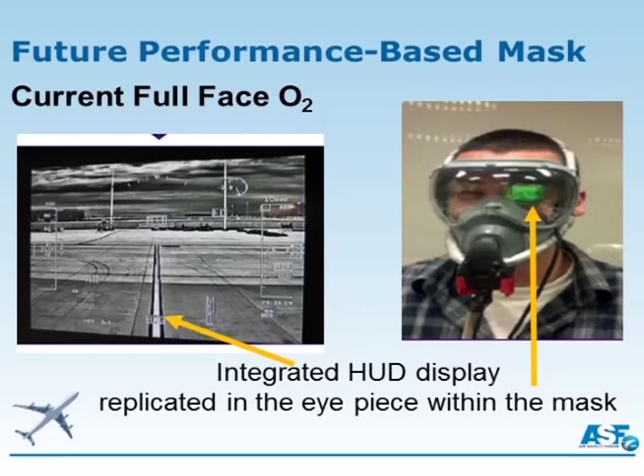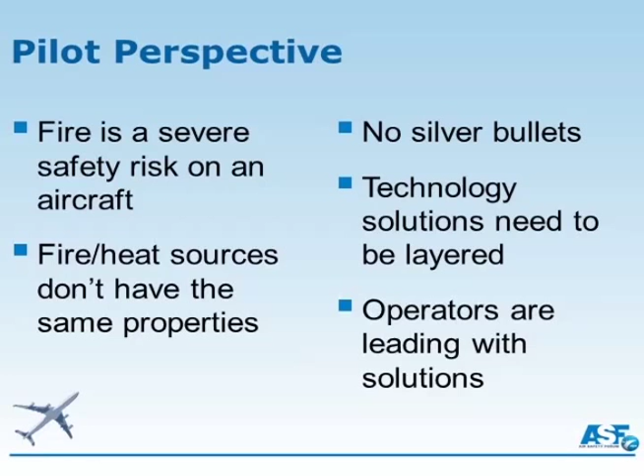From a pilot's perspective, no doubt, fire is a severe safety risk on aircraft. Not all fires or heat sources have the same properties, which means no one solution is a golden BB or silver bullet. Technology solutions need to be layered. Right now, the operators are the ones leading the way. Time is that critical element, and layered solutions give us that time. Time gives you options, and as my dad always told me, options are good, especially when they're yours.

A common level of risk needs to be understood, and our teammates at the FAA are helping all the stakeholders through their testing understand what that common risk is. With that, we need to ramp up and accelerate our battery testing to further capture data for the here and now, and the increase of battery shipments coming in the future.

All this said, we need to set conditions and execute control over this dangerous good. We need to know specifically that it's on our aircraft, how much there is, how it's packaged, and where and how it's loaded. Is it on the main deck? Is it in the belly? Is it in that pallet bag, a DG can, or another ULD? No matter how the regulations follow this line of thinking, the intent should not allow for a single box of a certain number of lithium batteries to be under the minimum regulation threshold requirement for DG identification, then an overpack by adding 300 more boxes to that shipment on that airplane.

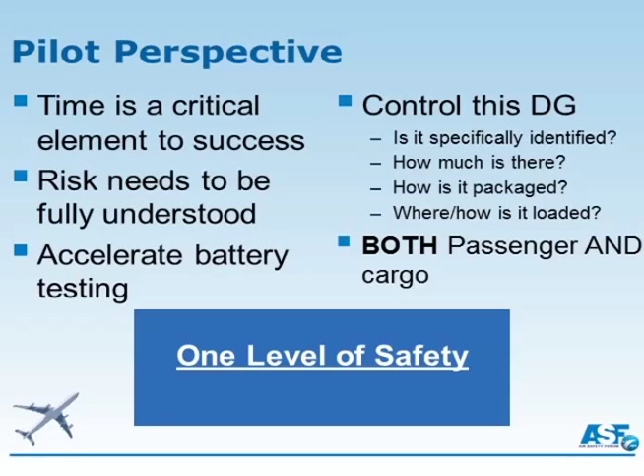So, moving from theoretical to practical: imagine my MD-11 flying from Memphis to Milwaukee, and my first officer and I are 50 miles south of Chicago, and we get a cargo fire indication on the main deck. First, we both put our oxygen masks on, and then immediately head for the nearest suitable airport with a 500,000-pound airplane, 50,000 pounds of fuel, and 100,000 pounds of freight, to make an emergency landing.

But a cargo fire is a different type of emergency. Our airplanes are designed to lose an engine, and we practice that, and we land consistently with a lost engine. This is different. We don't know the outcome to a certainty or a level of certainty like we do with an engine failure. It's a level of emergency like few others, and the nature of this emergency, as I go to that nearest suitable airport, puts everyone beneath my flight path at risk.

So, with that, I'd like to have a happy ending with a cargo fire, but in the risk equation, we need to incorporate the risk to the American public below our national airspace. So the fatality cost basis metric used by the OMB only accounts for people on the aircraft. This is a poor metric for safety performance. It's just, to me, it's obvious. A cost basis for human life present on the aircraft determines the risk for only one part of that equation. A metric that accounts for the risk for the people below my flight path is a better equation.